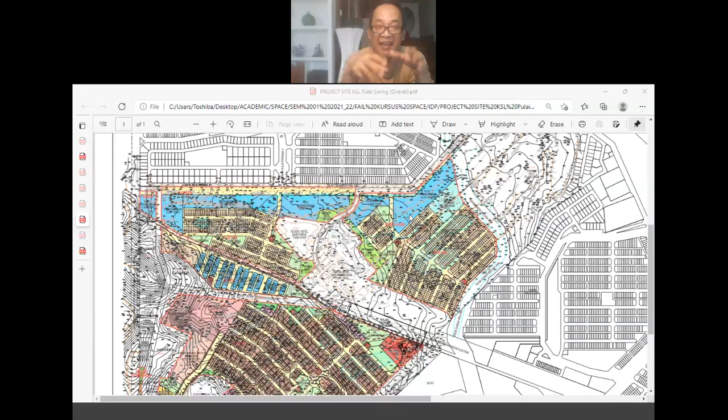The first drawing is just the topographic drawing that shows the initial site before any development, before development, what is the topography condition of the site, whether there are any lakes or any small waterway or river in the site. So that is the topography or the actual site condition before development.

And another drawing is showing the proposed development. So here what we see is an overlapping of the proposed development together with the topographical map. So it's a bit confusing, but that's okay, this is just to show an example.

An example of what to expect: each group will be given the same drawing, the same site. One drawing on topography only, another on the proposed development. So actually it's the same drawing, we just close off layers. We close the layers and save one as the topography layer, and another as the development layer. This is to help you understand the existing condition of the site prior to development.

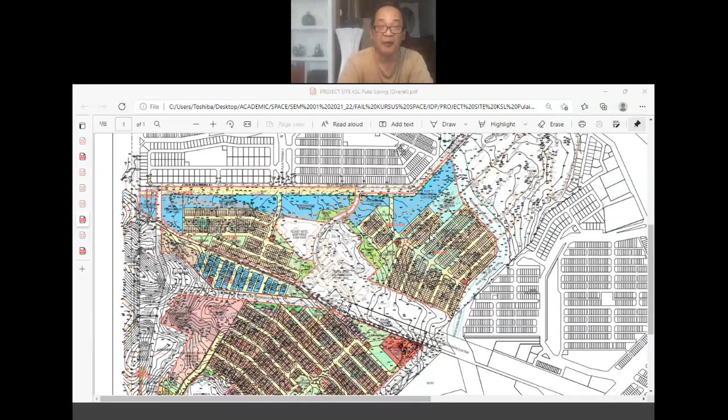What are the site features in there? What is the natural topography? What are the natural levels of the site before development? And the next drawing is the proposed development. So based on these two drawings, you will come up with a proposed level for the overall site.

Once that is done, the groups doing erosion, costing, and water reticulation will proceed once they have the levels. So it's crucial that earthwork gets more resources, so that more group members concentrate on earthwork. You need to get the levels out as quickly as possible. Therefore, put in more resources, more group members into the earthwork topic.

Maybe 4 students or 4 group members doing that, and the rest, I think you need a maximum of 2 members each for erosion design, costing, and water reticulation. So that's just to give a basic idea of what to expect in IDP 1.

First of all, you will be assigned into smaller groups of 9 to 10 students. Each group will be given a set of drawings, and from those drawings you will tackle the 4 topics that I've listed here.

Out of these 4 topics, the crucial one is earthwork, because until there are proposed levels for the whole site, the other 3 topics cannot start. They will be very dependent on the levels produced in the earthwork section. So that just highlights the importance and dependency between the different subgroups within each group. Any questions that aren't clear?

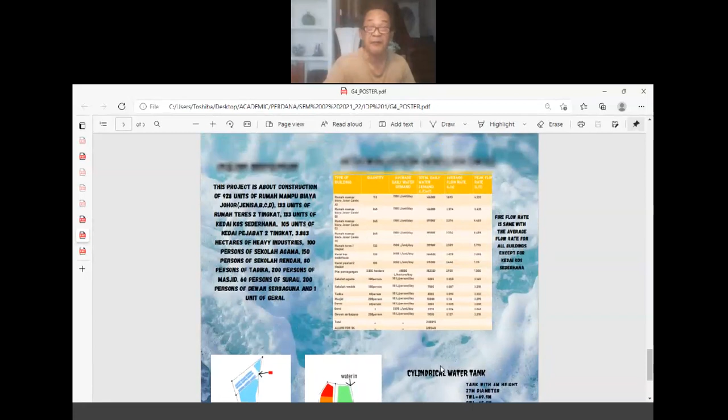This is one poster from your seniors, group number 4, indicating altogether there are 5 posters. One poster is for the group members, distribution of work and group profile. Then one poster on earthwork, one poster on erosion, one poster on water supply, and one more poster on estimating. So this is what I mean by poster submission, an example of the posters produced by your seniors. I think they've already graduated.

All submission, whether poster or final report submission, will be through e-learning. We will open up a link, each lecturer or each coordinator in the section will create a link in e-learning, and that is where you submit your poster and your final report. So these are the two important dates.

On the 30th of June, the last day of this semester, week number 15, you will be required to hand in your final report submission. And at the same time, we will be doing a presentation where each member would present their work for the whole semester to a panel of lecturers, online.

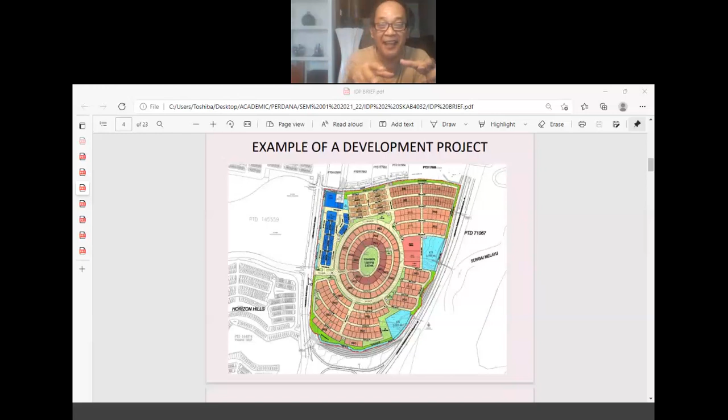So the road connecting the existing road with the new road will of course be at the same level. So from there we already have the level of the road at the junction where the new road connects to the existing road. Because the existing road already has a certain level, we can't use a different level from the existing level. Of course we will use the same level, and then gradually it may rise or gradually go down later on.

Maybe at this junction it will be at the same level, but then slowly it may go up around this boulevard, or slowly go down. That is secondary. But our first instance will be that we already have a starting point, a starting level, already here.

So that is why I like this particular site, because it is compounded, surrounded by existing development. There are already existing roads surrounding the site. So we can make use of all this information to come up with a proposed level. So coming up with a proposed level, one of the most important sources is to look at existing development around the site, if there is any. That will be our benchmark for how we can propose a level for the new site.

Okay, so this is part of your IDP later. In IDP we are training students to be able to justify or clarify whatever decision is made in your project. For example, in water supply.

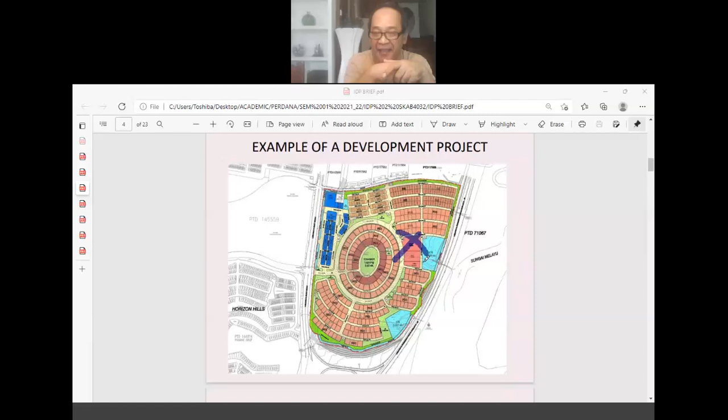In water supply, say your group has decided to locate the water tank at a certain position. Now someone, maybe your lecturers or evaluators, will ask: group number 1, you have selected your water tank to be at this location. Is there any rationale in selecting your water tank to be located there? We will be asking that sort of question in your interview session.

So the reply from your group will determine how responsive or elaborate your design is. For example, if the group says, sir, we selected this location primarily because at this location the level is the highest within the whole site, the earthwork level proposed here is the highest. And naturally, for water supply, from the water tank to all individual components, whether residential or shop houses (the blue ones are shop houses, the rest are residential), the flow of water from the tank to all components is by gravity flow, and that is the primary reason the water tank is located at the highest point.

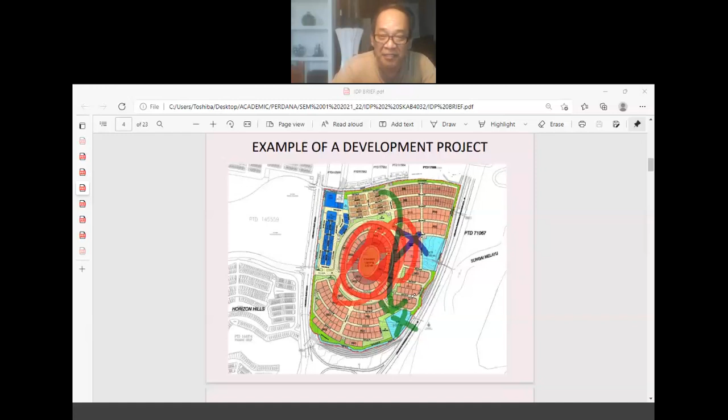So that is the main purpose, not so much on the accuracy of your design work, but more fundamentally on the justification of your proposal or your design solutions. So that is basically IDP.

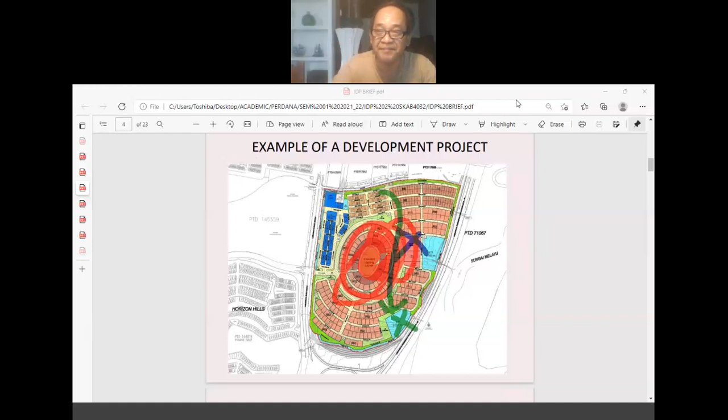Moving on from here, the example of a development project. You will go through all of this. These are examples, the topics related to IDP 1, which is a two credit subject. And this will be the topics in IDP 2. And these are the poster contents.

Don't look at this one, this is for semester 2, 21-22. Is it really semester 2? Okay, not that one. This is semester 2021-2022, but not this different one. Later, the one you need to refer to is this, the timeline here, this one, 12/5 and the 30th of June. This is your timeline, not the one from earlier. This timeline is different, from a different semester.

For evaluation, we will evaluate 10% from the poster presentation as a group, meaning everyone shares the same marks. Final report is 60%, again group marks, the same marks for everyone. The interview session will be on an individual basis, 30%. So the weightage is very much on the final report, so you need to start early so you can come up with a proper, complete report for all the topics: earthwork report, erosion, and water supply report.